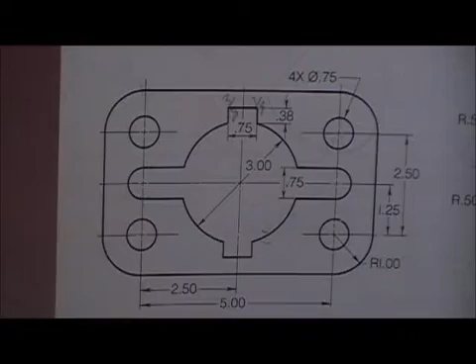Key plate. Okay, here we go. Let me zoom back in on the paper. I need to get my focus here with the pencil in there. I'm going to get out to where my borders are.

I think I bumped the camera just slightly. Now I've pre-started by going corner to corner to find the center. Again, this should be kind of an automatic thing when you need to center a drawing. This is way more accurate than trying to measure it with a ruler. And this is how, say for instance, you've got incorrect framing in a home, in a structure, you would measure corner to corner.

Because it'll tell you whether or not the stuff is plumb and square. So I'm going to go with making sure my T-square is bumped up on the edge, horizontal center line, and then I'm going to go with the vertical center line. Again, construction lines. I'm drawing a little bit dark here today, but that's so you can see it on the video.

And I want to get rid of the X used to find the middle. That's why, again, you want to minimize that amount there that you do this. There's our midpoint. Again, you see I don't make a big giant black dot, just make little marks.

Now our key plate is a relatively simple drawing. The measurements are straightforward. What I am going to do is try to set up initially where we're going to do centers for our circles on the left and right side of the drawing. So the overall length from center to center is 5 inches.

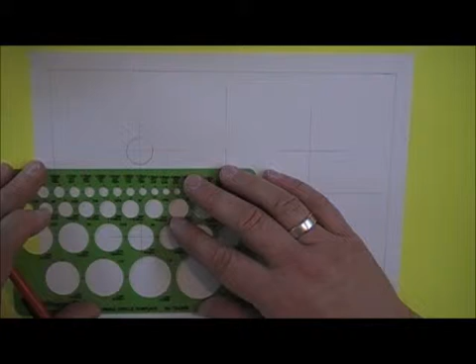I'm not using the T-square with this. I just line up the little marks with my center lines. That's why it's important to spend time making the center lines. That's how people get out of alignment, by not doing that.

We go here, and we go here. Now, we also have a channel in the middle here that's 3/4 inch. If I tell you to make a half of a circle, you go from top to bottom, either on the outside or the inside, depending on the direction you need to go.

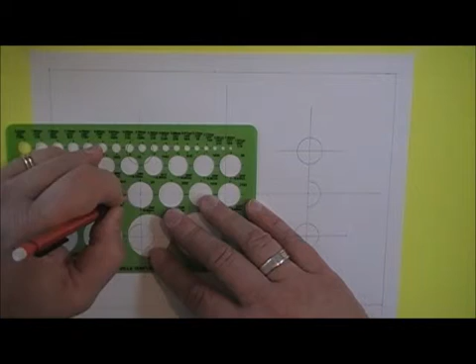The dimension was expressed not as a diameter of the circle, but the distance the channel was. The channel distance on the flats, where there's a flat line here and here, which I'll draw in a minute, is 3/4 of an inch, which tells me this diameter is 3/4. So I've got those done pretty quickly.

Now, in the center of the drawing, there's a 3-inch diameter circle. I'm going to take my large circle template and line up the little pinholes that are on here. This one was designed a little bit cockeyed, but that's okay.

There's some cutouts, so I'm not going to go quite all the way. I'll just leave a little bit of space, because I know I would just be erasing the lines anyways. That's just a little prior planning on my part. I've drawn this drawing I don't know how many times.

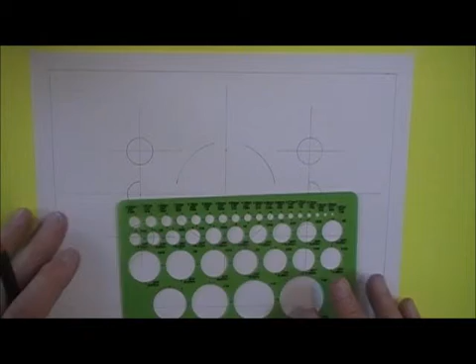Now, I'm not going to use my T-square on this, I'm going to use my circle template. I'm going to put my pencil right at that mark at the circle, and again right there, and draw the line at the edge of the circle template, up to the 3-inch diameter circle, just like that.

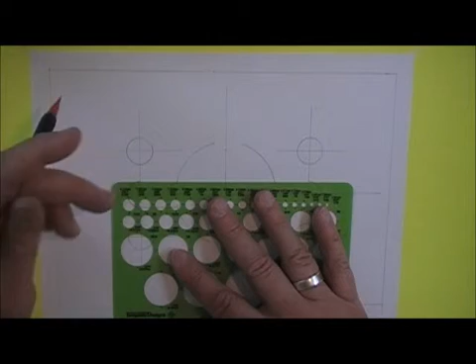And then I'm going to do the same thing here. Again, if you place your pencil on the actual mark, it aligns better. There we go, that's done.

Now, there is a 1-inch radius on the corner, which we could use the compass for, measuring 1 inch out here. But what can we do? We can also do this with the circle templates.

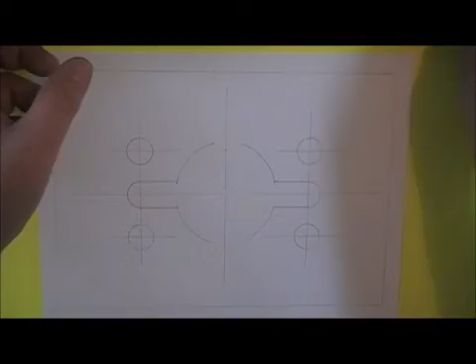We can actually take our compass, and notice I'm just randomly going from 4-inch to 5-inch. That gives us 1 inch. I encourage using different parts as opposed to always going back to the first numbers, 0 and 1.

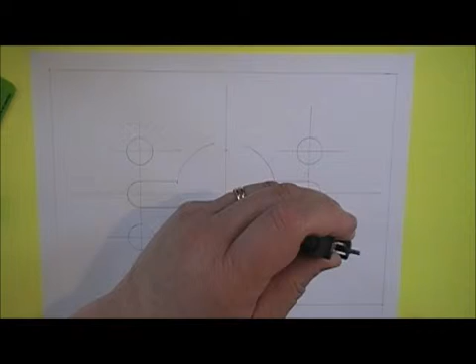Now, if we wanted to, we could go like this and draw what would be 90 degrees of a circle with our compass. That would be placing the hard point there and drawing the radius. There's our 1-inch radius. Now, I drew it very lightly.

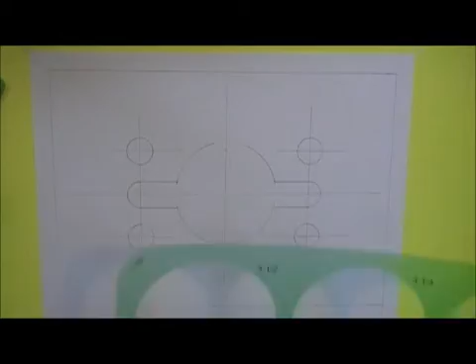What I would rather do, and rather see you do to speed it up so you can get done sooner, is use the 2-inch diameter circle. Because if we have a 1-inch radius, we double it, that's a 2-inch diameter.

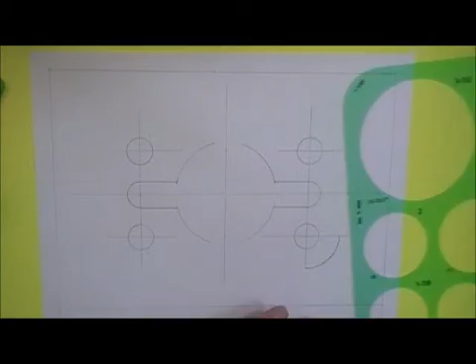So we line up our marks right here, and you can very faintly see the mark from the compass is right there. This is a 90-degree section of the circle. So even though it's a 2-inch diameter, it's a 1-inch radius.

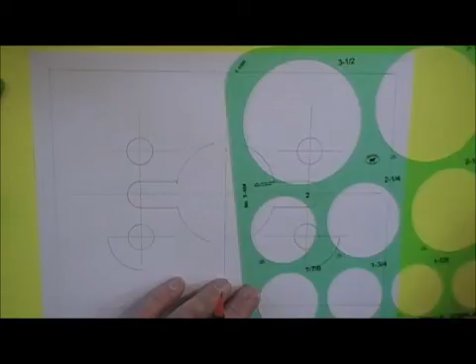Now, make sure your center lines are longer. As you can see, I flattened this out - those are corrections for later. I've done this enough, but my expectation is you should have your center lines drawn all the way out there so you can catch them.

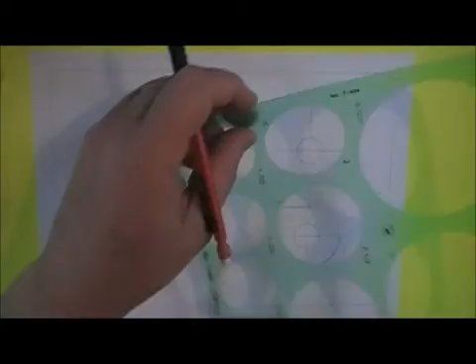The other thing is, if you can get away with 2 pretty easily also. Like right here, this one, and this one, those center lines all match where the dot is. Again, we're going to do 1/4 of our circle, or 90 degrees. So if I tell you to do it 90 degrees, that's actually what I'm meaning, just to do a 1/4 circle.

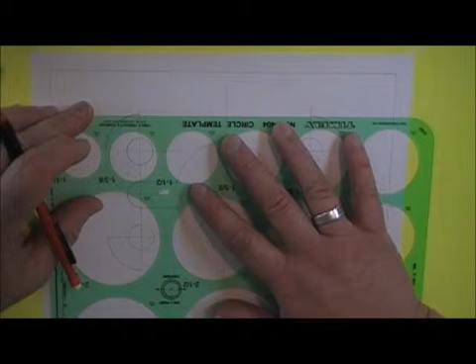Now this one, I've caught these 2. Now I really have to eye this one up. There we go. Again, I'm going to do the same thing, I'm not going to use my T-square. In theory, the T-square should make it perfect every time, but sometimes it's off just slightly, and then the line jumps and makes a different spot. So I connected the ends of the circle there.

I'm going to use the small one so it's not bending too much when it hits me. I'm going to go there. Then I'm going to go from the end of this. Again, it's where the center line is, not where the circle bends around necessarily. Oops, I missed it.

So it's nice and light. I'm probably okay over there. Go here. Go there. There we go, done.

Now we're here. There's our object lines.

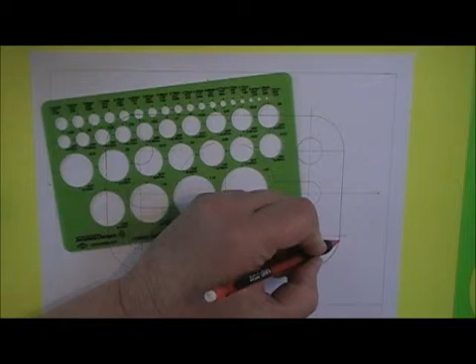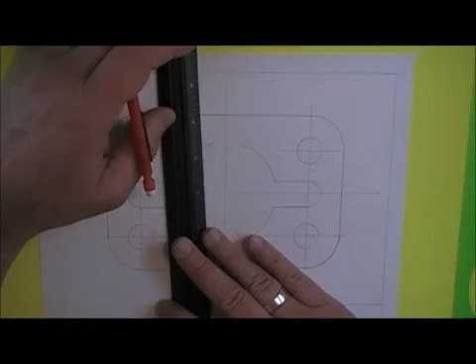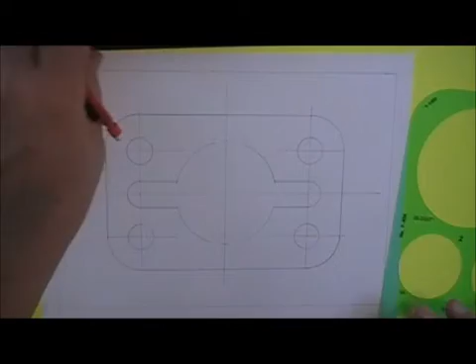Now, our last part is we have to construct a 3/8 high box, like a notch, a cutout for a part to fit in. Realistically, I probably should have done this before, but I'm going to do it anyways. I'm going to just make a mark here and there. That's going to have to be erased later on, but now I can see where my 3/8 has got to be.

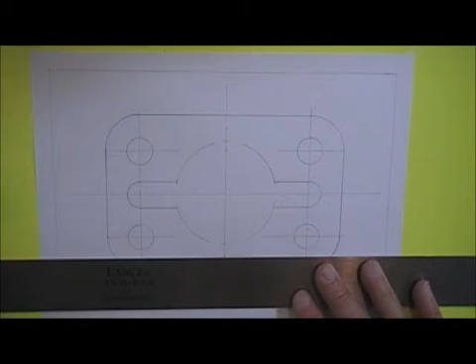And 3/8 is 6 spaces on the ruler. So I'm going to go up 3/8, and I'm going to go down 3/8. 1, 2, 3, right there. Then I'm going to use my T-square to go across, across.

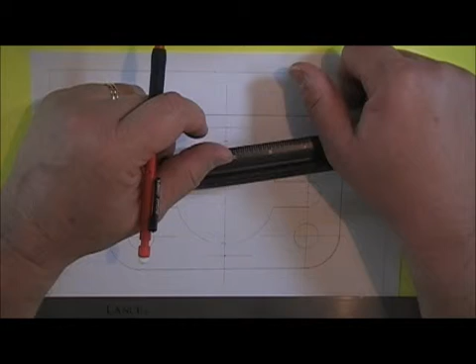Now, the distance is 3/4 of an inch, which half of 3/4 of an inch would be 3/8. Again, cutting a fraction in half: if you have 3/4 of an inch and you want to cut it in half, you keep the top number the same and double the bottom. So top would be 3, doubling 4 would be 8, so 3/8. So I'm going to go with 3/8, 1, 2, 3.

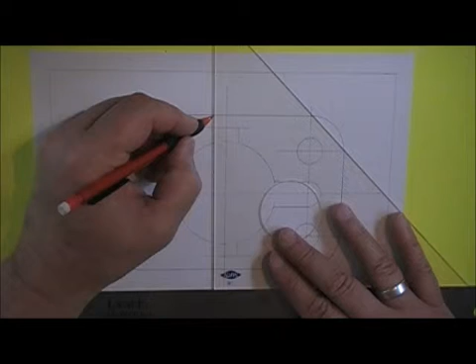I'm going to set it up there, and then 3/4 is right there. So 3/4 is there, 0 is there. And I'm only going to measure it one time, because now I'm going to use my triangle, and I'm going to line up here. I'm going to draw my line here, and I'm going to draw my line there. Same thing, I'm going to find the point, slide up to it, go here, and then go here, and that's our cutout slot.

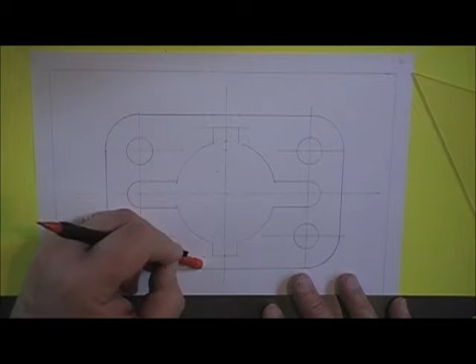Now all we got to do at this point is get rid of all the extra marks, add in maybe spots that are missing, and draw our center lines. Remember, our center lines are very important to maintain the integrity of the drawing.

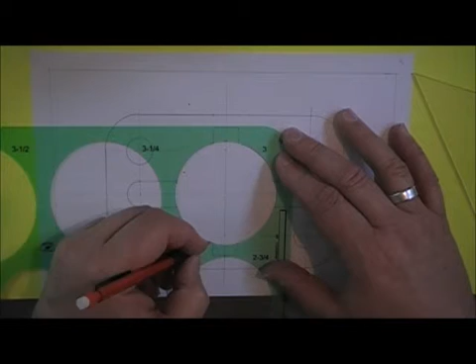Now I've got a couple of 3-inch marks right here that I need to pull up to and get, so that I fill that gap right there, and I fill that - oops, the thing jumped slightly on me. Let me get rid of that and start over. Again, erasing - try not to get in the habit of correcting by just adding more. You're better off taking the time to erase and just redraw the little part there.

Now, as you notice, there's some overlaps. Again, an eraser shield is very handy, and I don't have one with me today, so I'm going to use just a straight edge from a triangle.

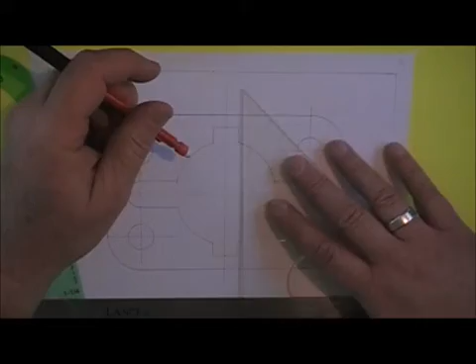And I'm going to close this corner right here. Notice I'm not free-handing it. Try to get rid of that little tail sticking out there, so I'm going to cover up the line I want to keep. And I'm going to do the same here. Notice all I'm doing is just isolating that right there. Done.

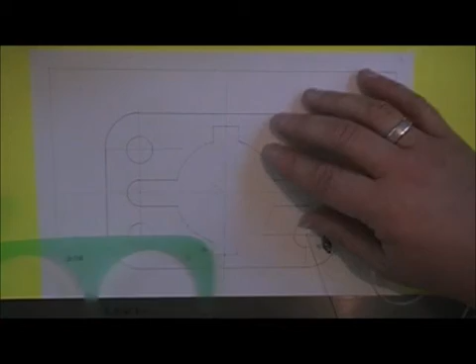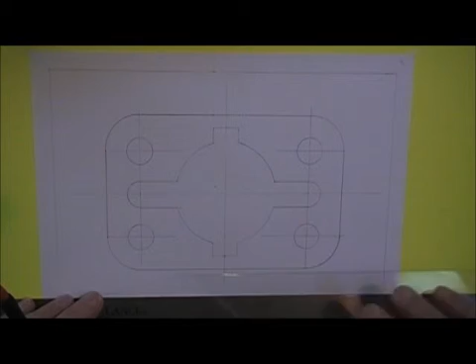Now, for the most part, this drawing looks pretty good. That's how you construct this drawing. If you're good at doing dimensions and good at doing center lines and borders and good dark object lines, you should be able to do this again in one period, because right now I'm into about 15 minutes or so with this, and going over again and putting all the dimensions on might take me another 15 minutes or so.

Get the border and title block all darkened in. Remember your object lines when you're drawing your object lines. My preference is, of course, to use a pencil like this that's slightly dull. Go down and back. And then for your border lines, my recommendation is to go down and back a total of 4 times, and you can do it with your T-square. Try to avoid making double lines, and make sure you rotate your pencil a little bit. That keeps it from developing a flat spot and making it like a paintbrush.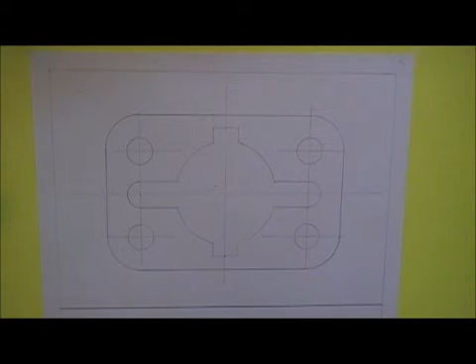I'm going to go one more time. There's a nice dark border line. See how consistent it is? Don't sketch. Don't be going back and forth.

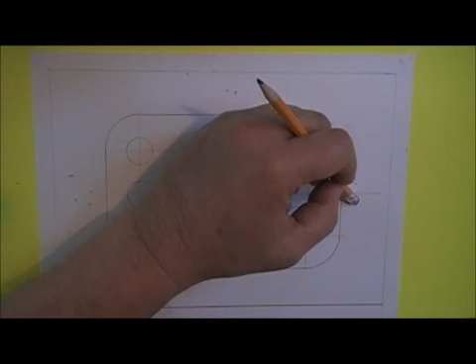Use your eraser shield to erase little things like these to get rid of them. Your center lines should end about 1/4 of an inch past, so you want to get rid of these long lines here. And consistency is the most important thing. So you would extend this out the same as that, extend them out. These can be erased back to there, but you may want to use them as dimension lines.

So there's a lot of little cleanup things that make your grade higher. But there's the key plate. That's roughed in. It's a relatively simple drawing, and as you saw, it was pretty much a circle template drawing where it just does everything using the circle template. So enjoy, get good grades. Take care.